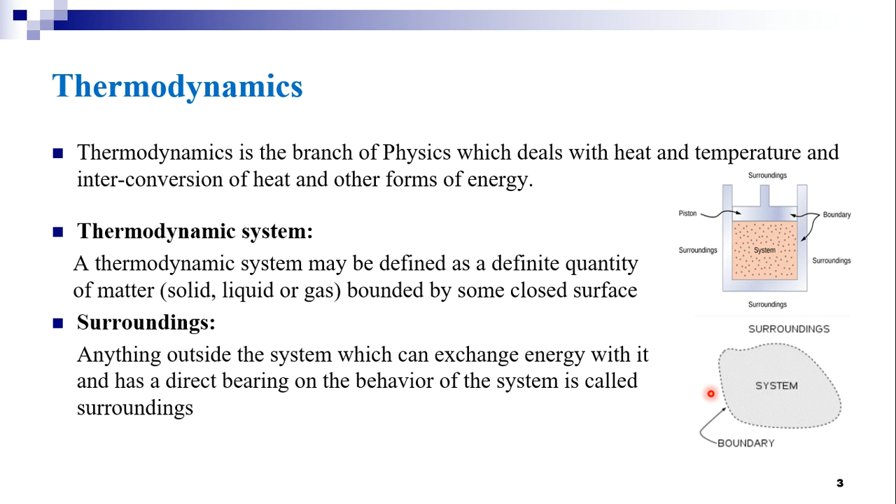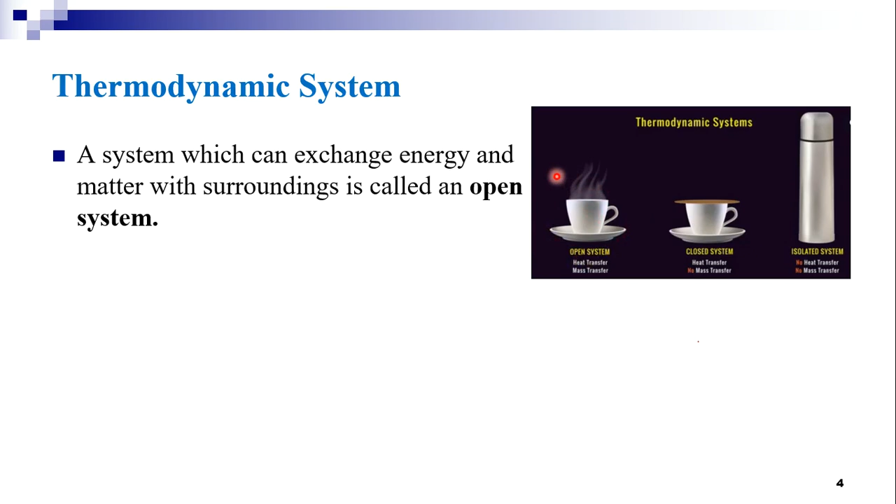So here, for example, if you have taken a cup of coffee, you can observe the vapors are exchanged with the surroundings. So here vapor in the form of matter is exchanging. Also the heat is exchanged with the surroundings. Such a system is known as an open system. Now here it is a closed system. This cup of coffee is closed with some lid. Therefore, a system which can exchange only energy and not matter with the surroundings is called a closed system. So here only heat exchange is taking place, but no matter is exchanged.

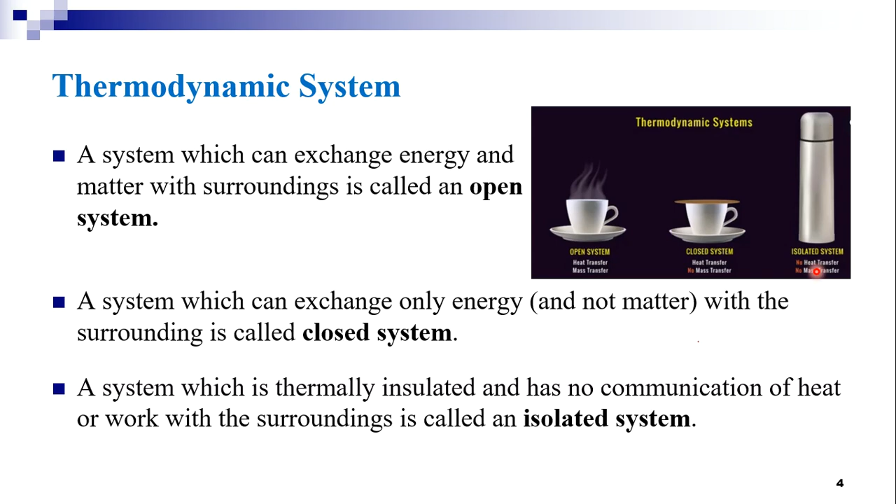Example for closed system is a gas enclosed in a cylinder expands when heated and drives the piston outwards. The boundary of the system moves, but the matter in the system remains constant.

Now we shall understand about the thermodynamic equilibrium. We can define thermodynamic equilibrium as the state achieved by a system when it is in mechanical, thermal and chemical equilibrium with its surroundings. Hence, any state of homogeneous system in which any two of the thermodynamic variables, pressure, temperature and volume remain constant, as long as the conditions remain unchanged, is said to be in thermodynamic equilibrium.

A system in thermodynamic equilibrium must satisfy the thermal equilibrium condition, mechanical equilibrium condition, also chemical equilibrium condition. Thermal equilibrium. What is thermal equilibrium? In case of thermal equilibrium, there is no temperature difference between the parts of the system or between the system and its surroundings.

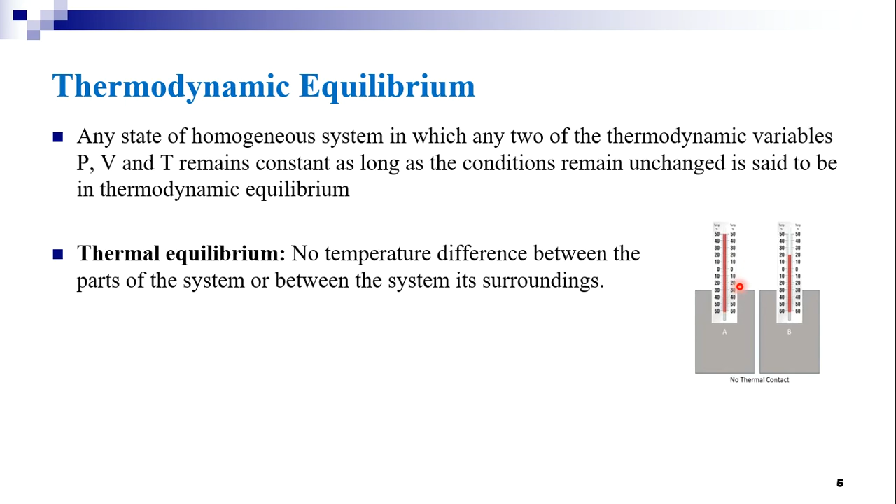So here in this picture you can observe there are two systems, A and B. When these two systems are not in contact, their temperatures are different. There is a temperature difference between the two systems A and B. When they come into contact, you can observe in the thermometers that both will have the same temperature. The two systems come in contact, the heat exchange takes place, and the two systems are said to be in thermal equilibrium.

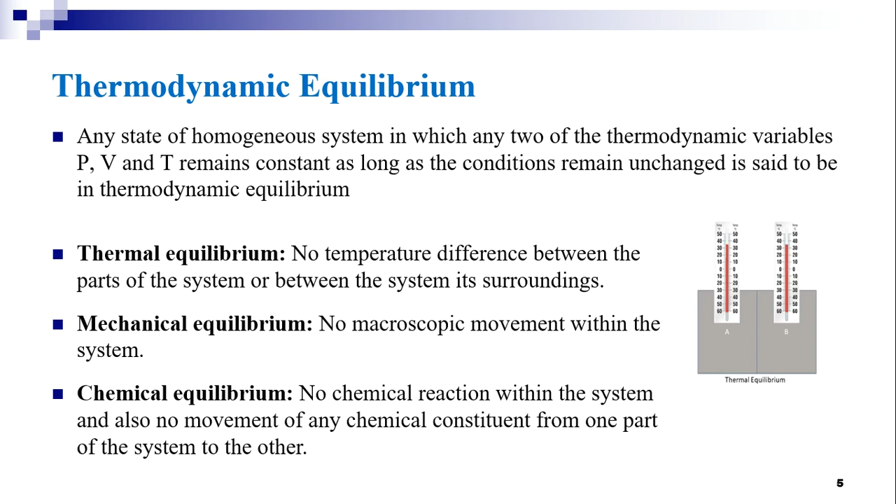Now we shall discuss the laws of thermodynamics. What we are discussing are all basic and essential concepts in thermodynamics. Zeroth law of thermodynamics. The statement of the zeroth law of thermodynamics is: if two bodies are separately in thermal equilibrium with a third body, then those two bodies will also be in thermal equilibrium with each other.

These two bodies A and B are separately in thermal equilibrium with the body C. Then these two bodies A and B will also be in thermal equilibrium with each other. So this is the zeroth law of thermodynamics.

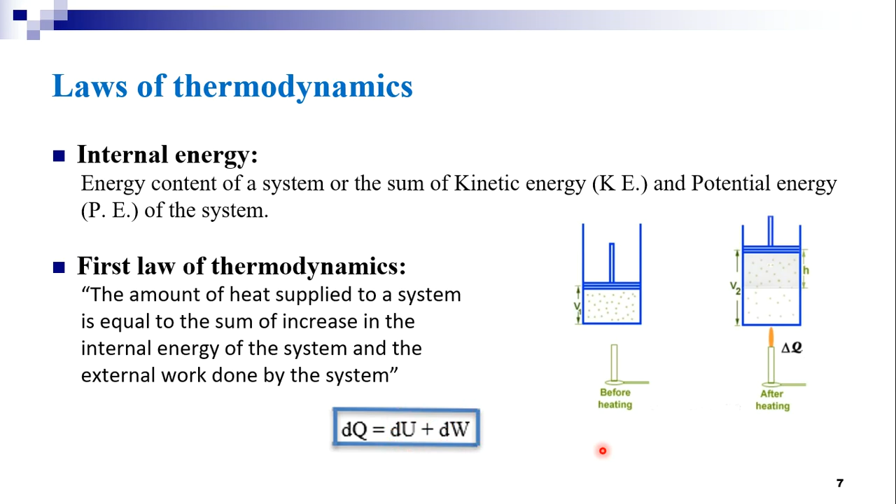Now we shall discuss the PV diagram. PV diagrams are a graphical representation of the variation of the thermodynamic variables such as pressure with the volume of the system. These PV diagrams are very important in understanding the thermodynamic process and the dependence of the thermodynamic variables on one another.

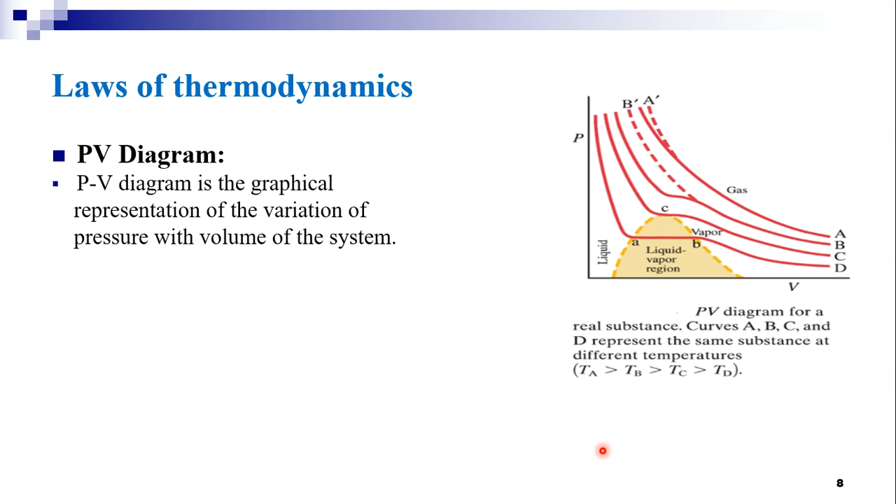If the volume changes, then the pressure of the system also changes. This can be visualized by the PV diagram. It is very useful in understanding the thermodynamic process for a system. If the state of the system depends upon thermodynamic coordinates such as temperature, volume, pressure and entropy, and any two are known, the third variable can be easily determined. That is, two thermodynamic variables are sufficient to describe the behavior of a thermodynamic system.

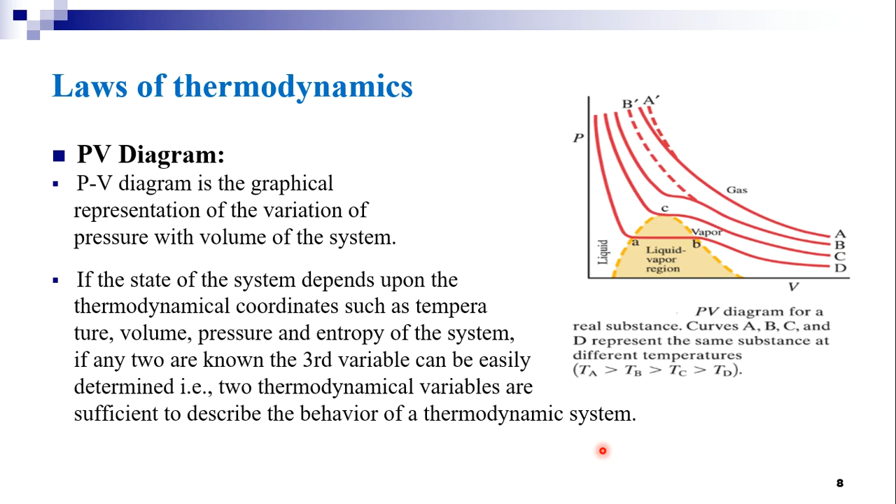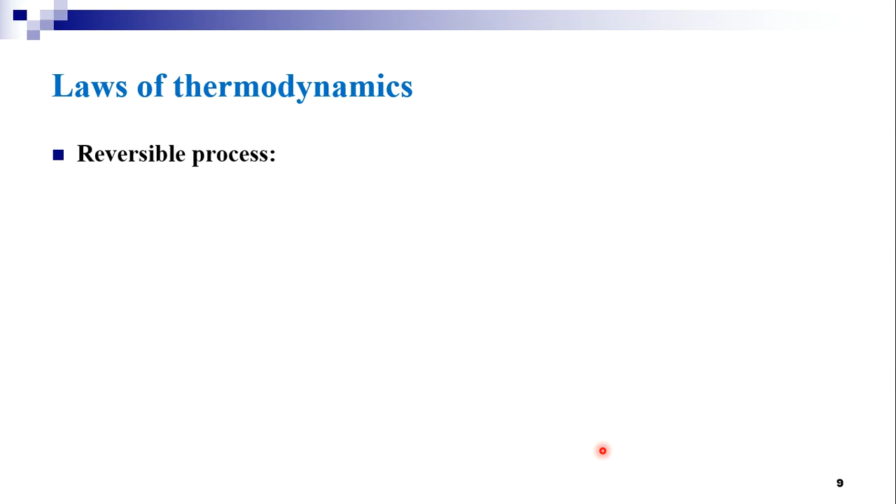Any thermodynamic process may be reversible or irreversible. These are very important in understanding the concept of entropy, etc. What is a reversible process? A reversible process is one which can be retraced in the opposite direction so that the system and the surroundings pass through the same state at each stage as in the direct process.

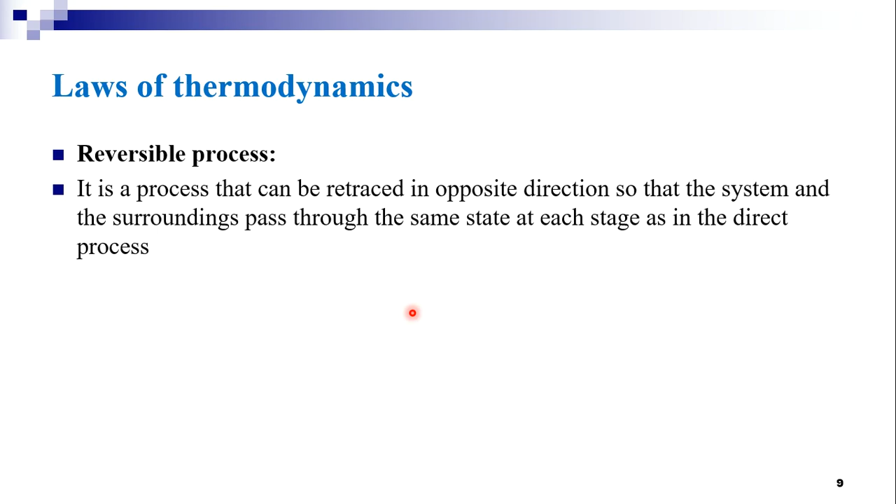Another example: the conversion of ice into water or water into water vapor. In this process you can reverse the process by reversing the thermodynamic conditions. The water vapor can become water when it is cooled, and water will become ice if it is further cooled. So in one way heat is given to the system; in the other way, heat is absorbed from the system. Therefore, this type of process is known as a reversible process.

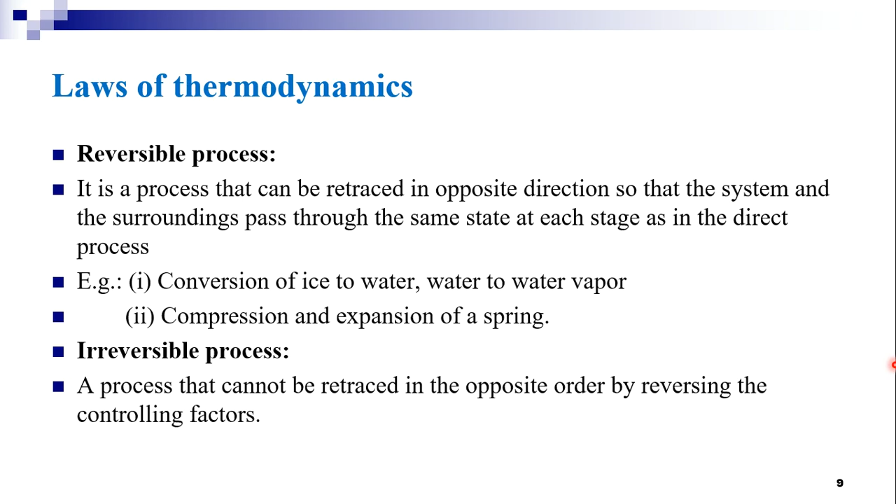Another example is the compression and expansion of a spring. Here also you can observe the reversible process. An irreversible process is one which cannot be retraced in the opposite order by reversing the controlling factors. For example, if you burn a paper, it converts into ashes, but you cannot make the ash into the paper. This is one example. You can see many such examples of irreversible processes. Other examples may be chemical reactions, decay of organic matter, growth of a plant, etc.

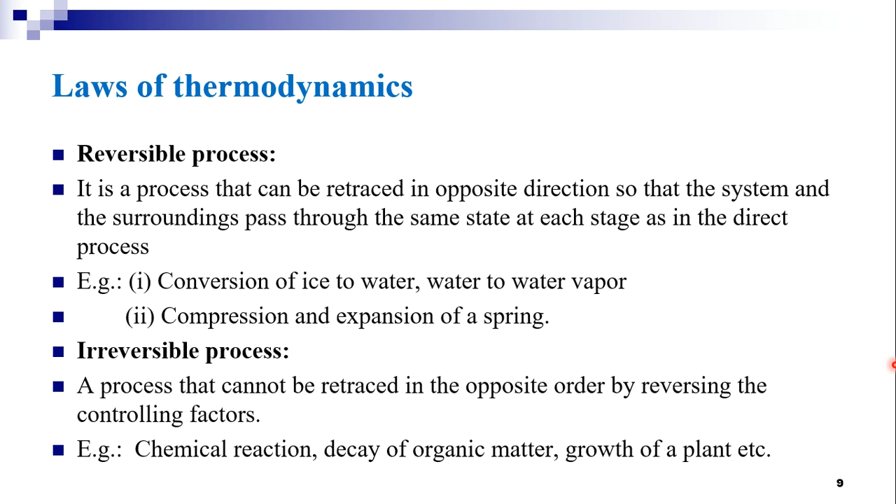Now we shall look into the laws of thermodynamics, that is, the second law of thermodynamics. There are two statements which describe the second law: Kelvin's statement and Clausius' statement. In the second law of thermodynamics, we can understand the direction of flow of heat in a system. This information is not given in the first law of thermodynamics.

Now we can state Kelvin's statement. It is impossible to get a continuous supply of work from a body by cooling it to a temperature lower than that of its surroundings. This implies that one cannot devise a machine which just absorbs heat and produces 100% work. An example for the Kelvin statement is the heat engine.

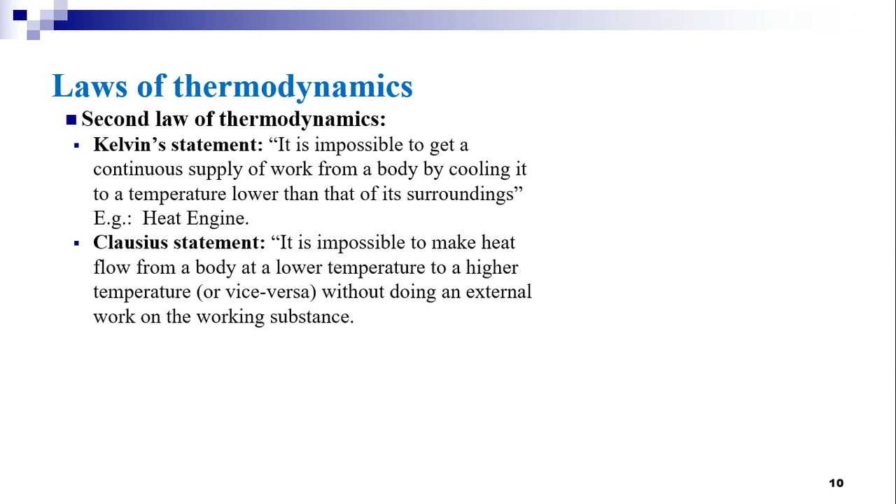The Clausius statement is: it is impossible to make heat flow from a body at lower temperature to a higher temperature or vice versa without doing external work on the working substance. For example, a refrigerator.

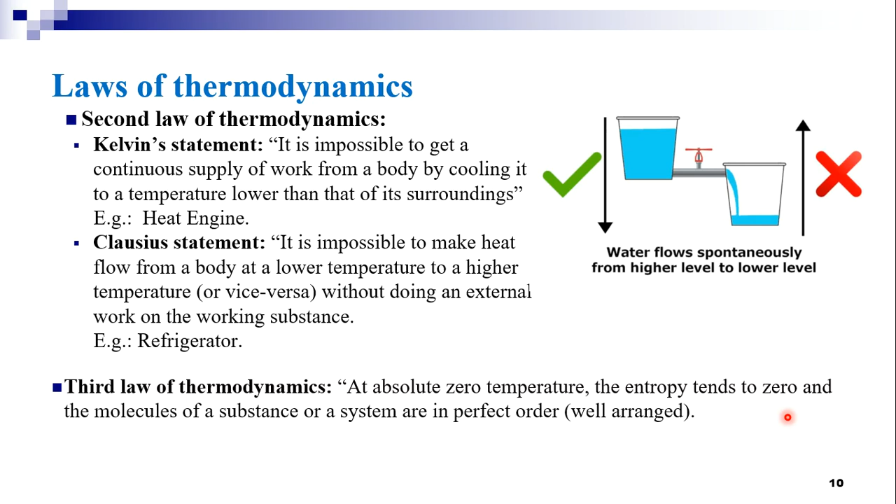Now we shall understand about heat engine.

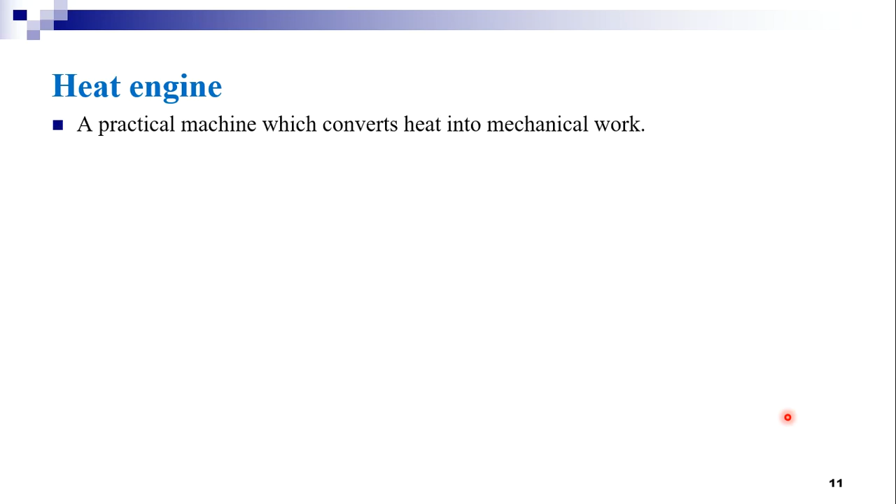In the operation of a heat engine, they absorb heat at higher temperature, convert a part of it into mechanical work and reject the remaining heat at a lower temperature.

A Carnot heat engine is a theoretical engine that operates on the Carnot cycle. Carnot devised this theoretical or conceptual heat engine which can operate between two temperatures, and he also said that the efficiency of a Carnot engine is 100%, but in practice 100% efficiency cannot be reached. It is only an ideal thing. Carnot engine is only the theoretical engine, we can say.

What is the efficiency of a heat engine? The ratio of mechanical work done by the engine in one cycle to the heat absorbed from the source at high temperature. This is known as the efficiency of a heat engine.

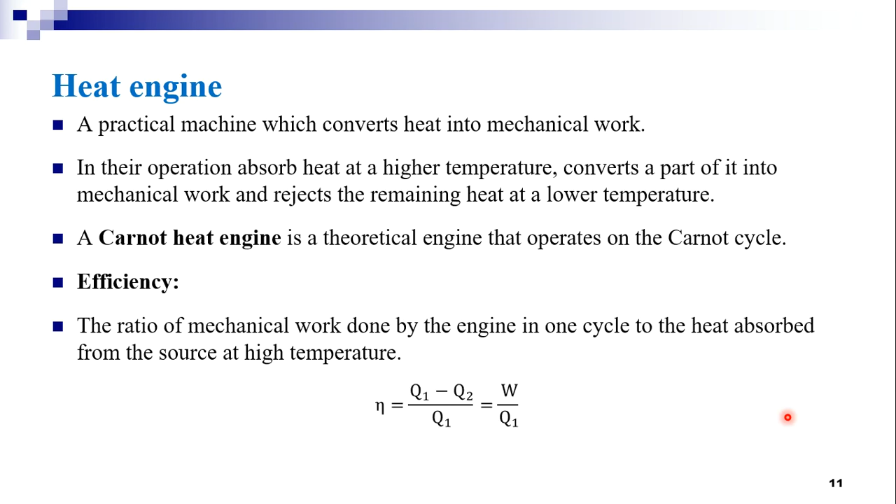This is the expression for the efficiency. Eta is the efficiency, that is equal to Q1 minus Q2 divided by Q1, where Q1 is the amount of heat absorbed from the hot reservoir and Q2 is the amount of heat rejected into the cold reservoir.

This difference, the amount of heat absorbed minus the amount of heat rejected, to the amount of heat absorbed, is equal to the efficiency. So this difference of heat, that is the amount of heat absorbed minus the amount of heat rejected, will give the work done. Hence the ratio of work done to the amount of heat absorbed gives the efficiency of any heat engine.